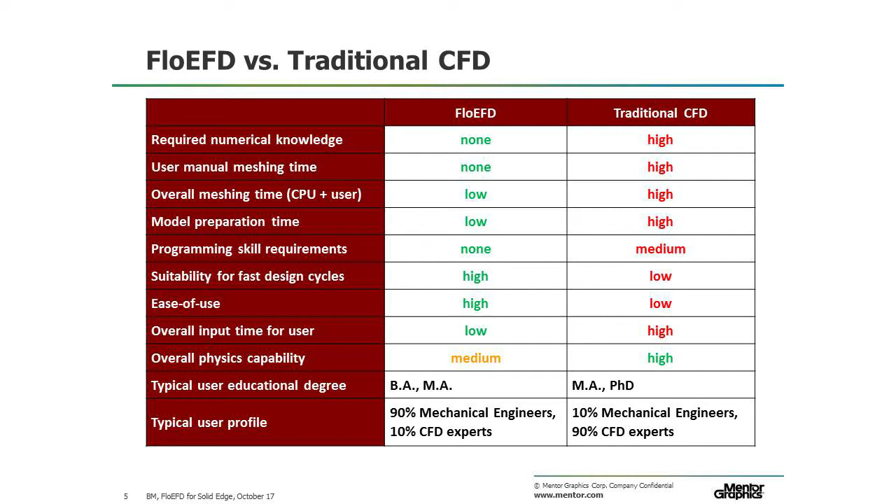Yo creo que voy a pasar, por el tema del tiempo, un poco a ver el vídeo que tengo preparado, que está muy interesante. Un detalle importante es: ¿cuál es la tecnología que está debajo de FloEFD?

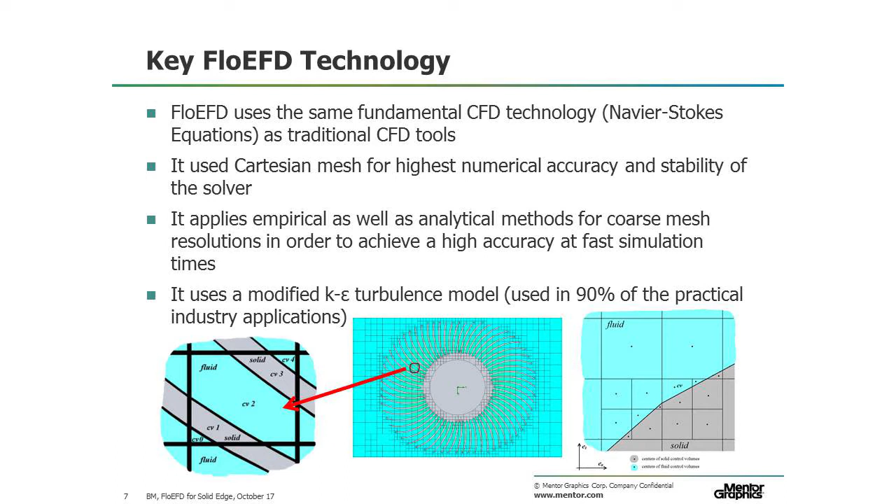Las técnicas de mallado son mallas cartesianas, no es la malla típica de elementos finitos. Es una tecnología que, al final, vamos a tener también que hablar de número de elementos, el tamaño de la malla es importante, pero no es la clásica de elementos finitos, sino que todo el dominio computacional, el dominio fluido, se discretiza con mallas cartesianas.

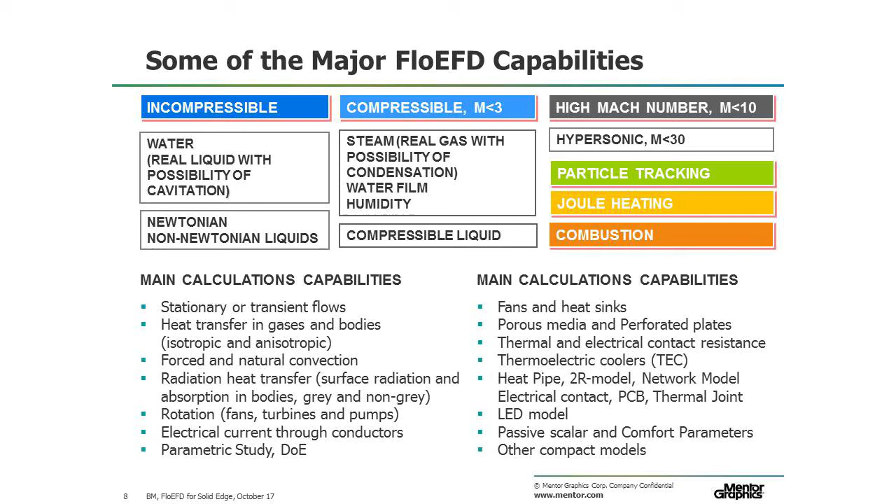Y el software es capaz de distinguir lo que es sólido de lo que es fluido, y la malla se refina. Es una tecnología en la que FloEFD es un código que se basa en las ecuaciones de Navier-Stokes, como todos los códigos CFD tradicionales, y utiliza un modelo de turbulencia K-épsilon, como todos los modelos de CFD tradicionales.

Capacidades realmente muy potentes, capaz de manejar fluidos compresibles, incompresibles, tiene modelos de combustión. O sea, es realmente potente.

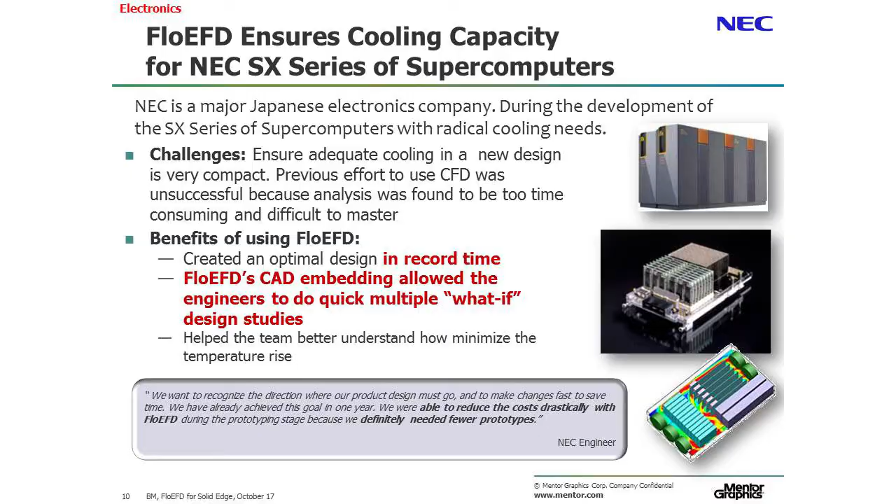Y hay diferentes módulos dentro del software. Y luego tengo un montón de ejemplos de aplicaciones, pero voy a pasar directamente, por el tema del tiempo, a enseñaros el ejemplo, el vídeo.

In this example, we'll look at how FloEFD, a CAD-embedded CFD tool for Solid Edge, can be used to analyze the flow and thermal management problem of a new audio amplifier to ensure that it meets consumer electronics standards regarding its temperature distribution. Let's take a look at our Solid Edge model.

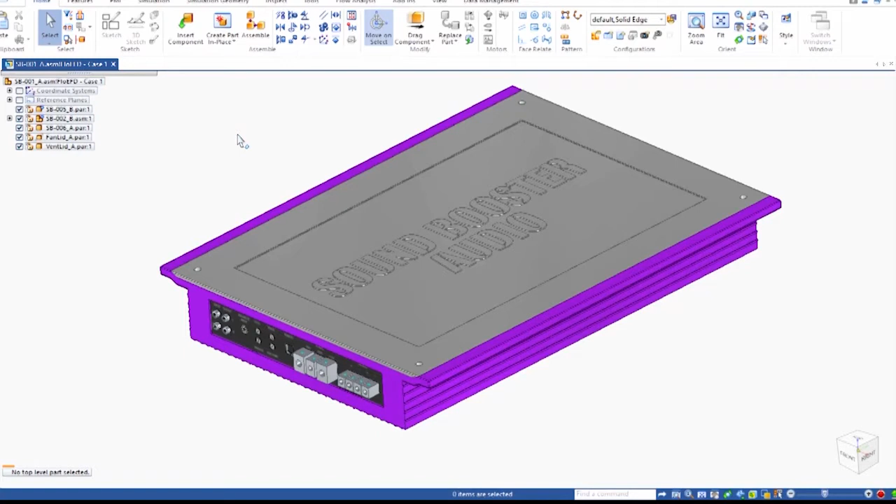You will notice that because of the FloEFD add-in, there are a few additions to the interface, like the Flow Analysis tab for the command ribbon and the FloEFD tab for the edge bar. What you will see as we set up the CFD problem and ultimately look at the results is that FloEFD ends up feeling like an extension of your already familiar Solid Edge environment. And one of the keys to that is being able to work directly with your native Solid Edge model.

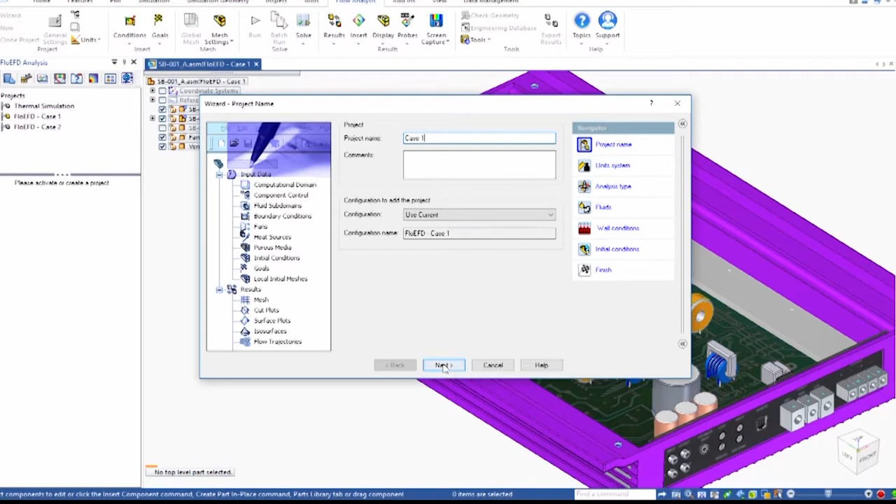A convenient way to create a FloEFD project is to use the wizard, which guides you through the setup of the basic definition of your analysis. First, you will name the project, then select the unit system. Next, you will define the analysis type. In this case, the amp is cooled by a fan, so the forced convection cooling within the box will be the focus of the analysis, and we'll define this case as an internal flow problem.

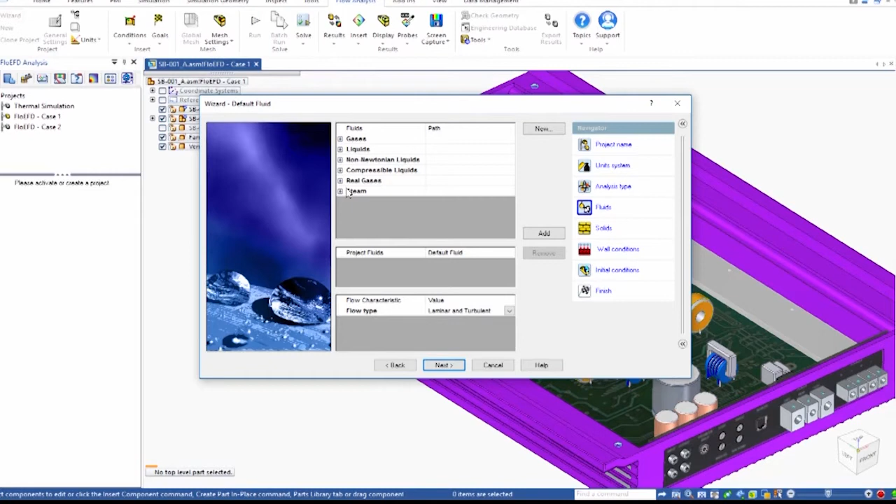Also, we want to include conduction effects, so we will select heat transfer in solids. Next, we'll choose the fluid in the analysis to be air and select aluminum as the default material. And even though we are not modeling the airspace around the amp, in this example we can still include the effects of natural convection by applying a heat transfer coefficient and ambient temperature.

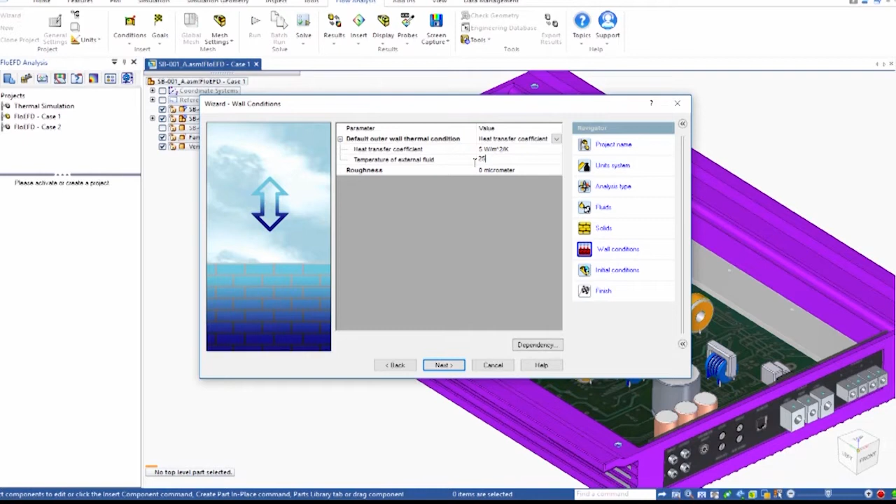We'll set some initial conditions and finish the wizard, which will create our project in the FloEFD tree named Case 1.

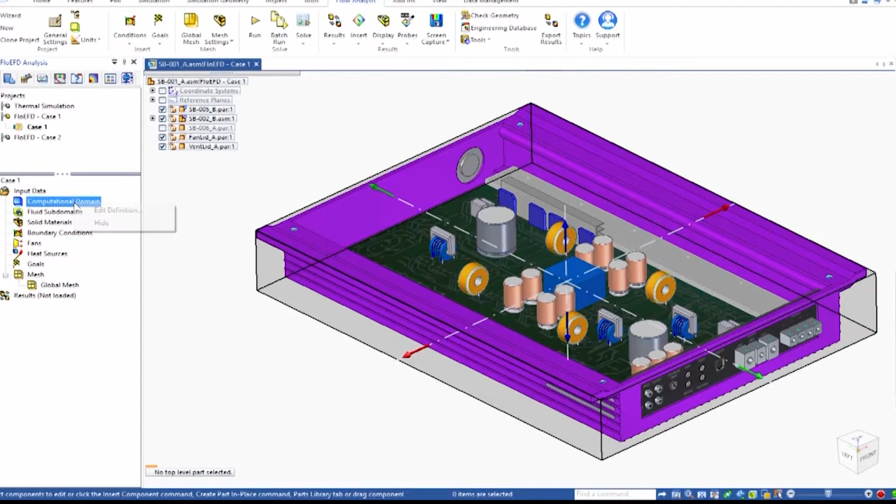Now we need to finish setting up the model by assigning the remaining inputs. We can see that the computational domain is recognizing the model properly, so we can go ahead and hide it, and get started by assigning materials to the components that are not made of the default material of aluminum.

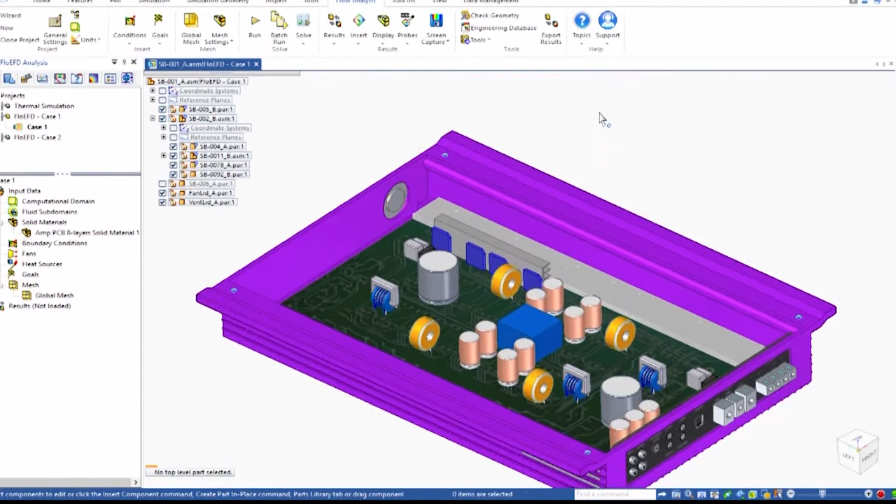So we'll select the PCB and assign it an anisotropic material property, since the conduction in the PCBs is typically different in the through-plane and in-plane directions. We'll also pick the transistors for this amp and assign a different material to them.

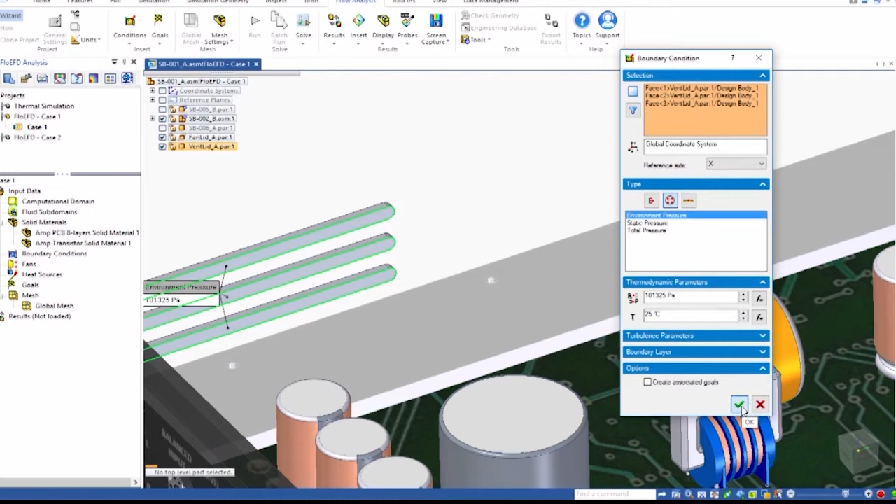Since this amp is modeled as an internal flow case cooled by a fan, we need to assign a boundary condition to the slots where the air can exit the enclosure. We have put lids over the openings of the enclosure at the inlet and outlets, and these serve the purposes of isolating the empty space within the amp that FloEFD can identify as the airspace, and also give us faces to apply boundary conditions to.

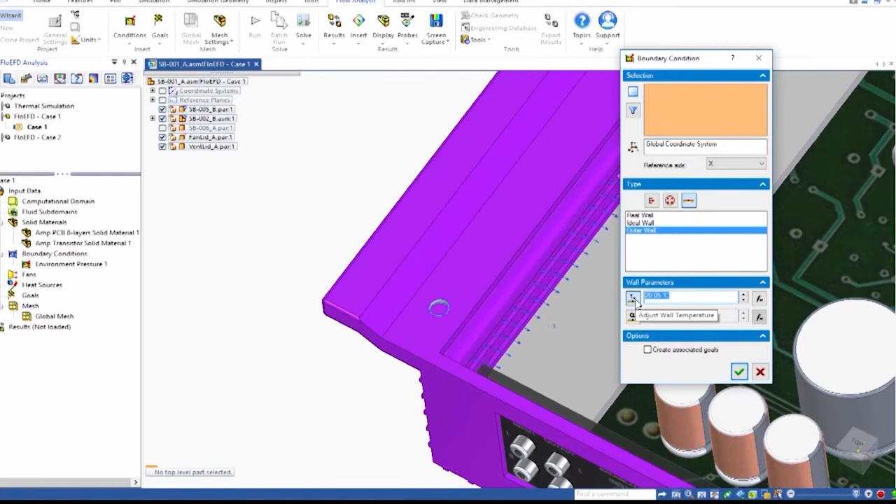Another boundary condition we'll assign is a temperature condition to the outside case along the two mounting faces of the amp. So for this, we'll again insert a boundary condition, change the type to be a wall condition, and assign the appropriate temperature of 25 degrees C.

Next, we want to add a fan to force air through our amp enclosure. We'll move over to the lid at the inlet to the amp and select the annular shaped face on the inside of the lid and assign a fan curve to it. And we'll include a rotational component to the incoming flow by adding swirl.

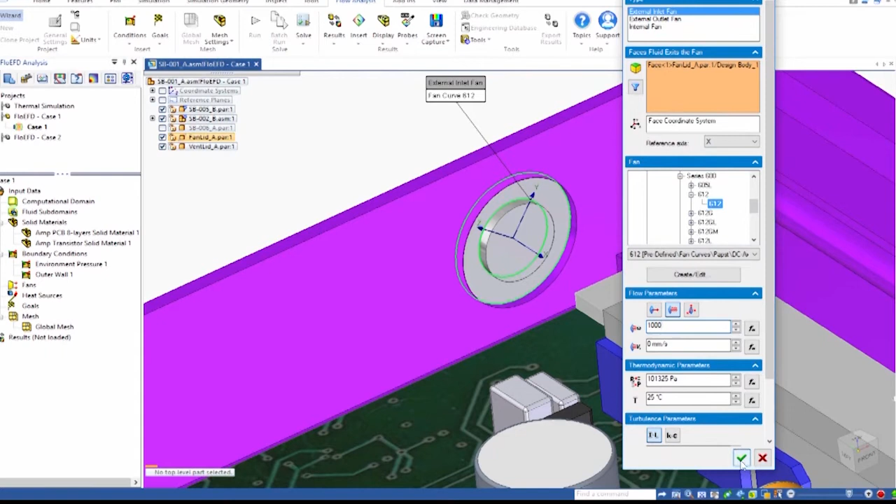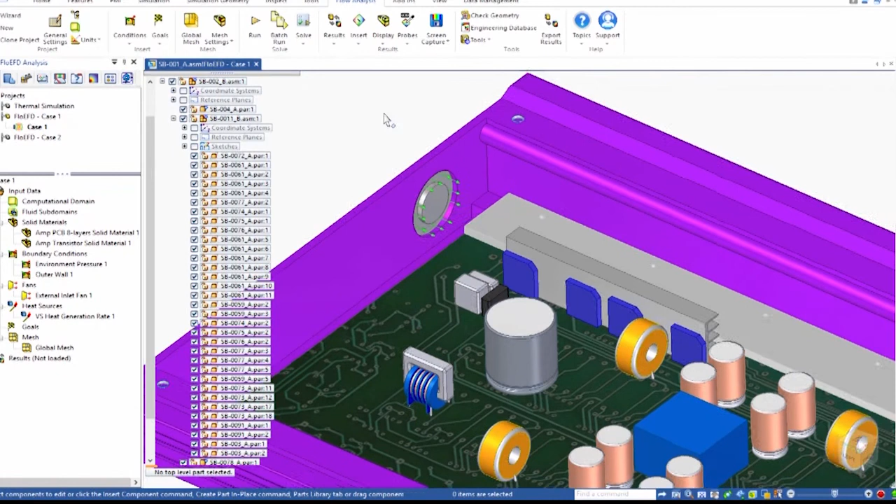Now we need to assign the heat sources. We'll select the 4 transistors and assign an overall heat generation rate to them of 20 watts. Next, we'll select the capacitors and give them a total heat generation rate of 10 watts. The remaining heat produced by the electronics we'll assume can be distributed across the PCB.

Next, we will assign some goals, which serve a couple of purposes. One, they are a way of extracting from the analysis quantities of interest. For example, we want to know how hot the transistors will get, so we will assign a volume goal of average and max solid temperature for these components.

Similarly, we want to know, based on the fan curve that we assigned, what the eventual flow rate is that is produced by this fan. So we can assign a volume flow rate goal to the fan face. The other purpose of goals is to help guide the convergence of the run, meaning that the solver will look for these goals to reach a steady state solution before determining that the solver phase of the analysis is complete.

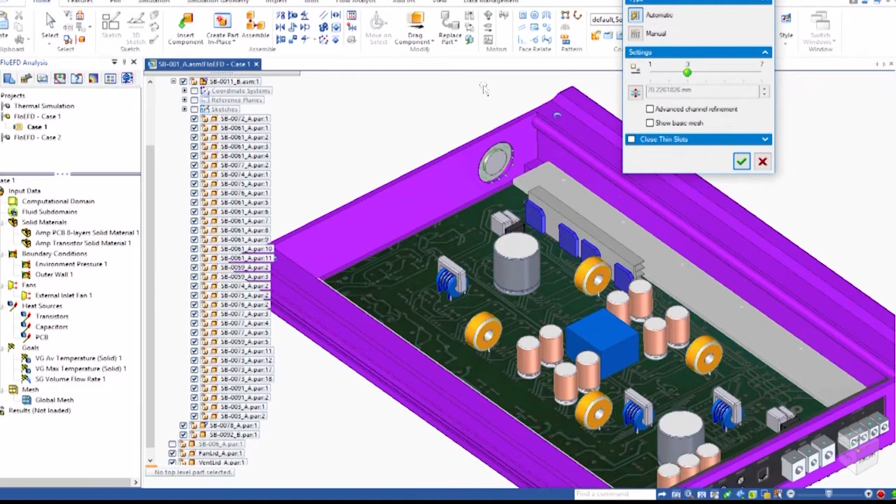Lastly, we'll take a look at our mesh settings. One of the core strengths of FloEFD, which overcomes a long-standing bottleneck in the CFD process, is its meshing approach. Let's look at the global mesh settings. The most common option is to use the automatic approach, which uses a slider bar to control the mesh fidelity. Through this simple approach, FloEFD can mesh a wide range of complex geometry easily.

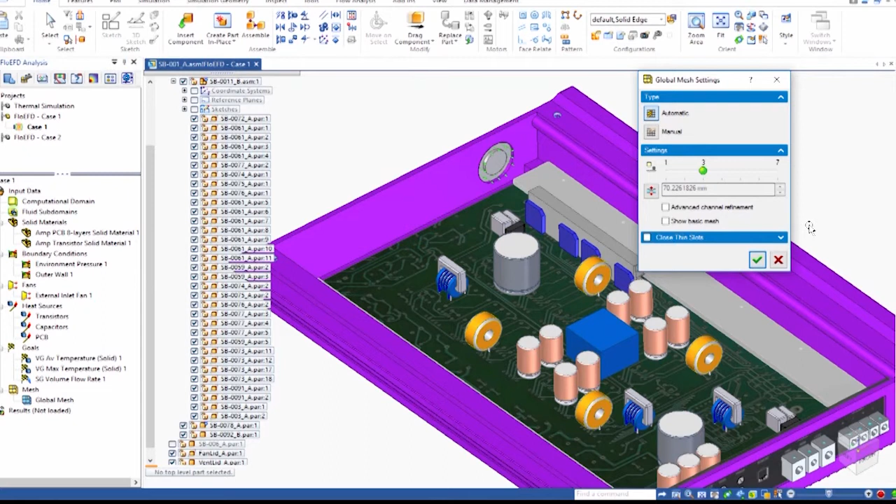And more advanced meshing options like local meshing and solution adaptive refinement are available as well.

Now that we have set up our problem, we are ready to run the analysis. This is the number crunching phase of the process, where the software will determine what solid and fluid volumes need to be considered, create a mesh that captures these geometries, and then solve the appropriate equations to reach a solution for the flow and thermal fields.

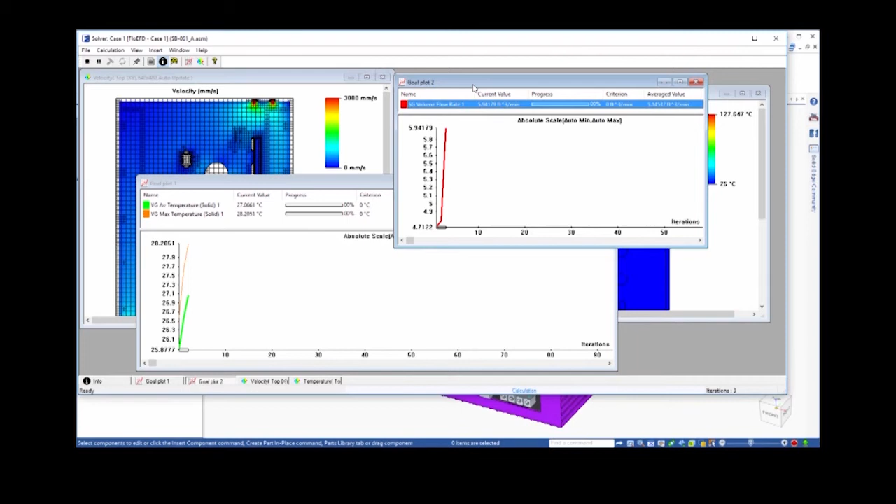This process can be tracked from the Solver Monitor window, which lets you chart the progress of your run, preview the solution at each iteration on various planes, and graph the convergence of your goals.

When the analysis is complete, the run will stop, and you can start to look at the solution on your Solid Edge model. Let's take a look at the flow field through the enclosure, and a nice way of showing this is through cut plots.

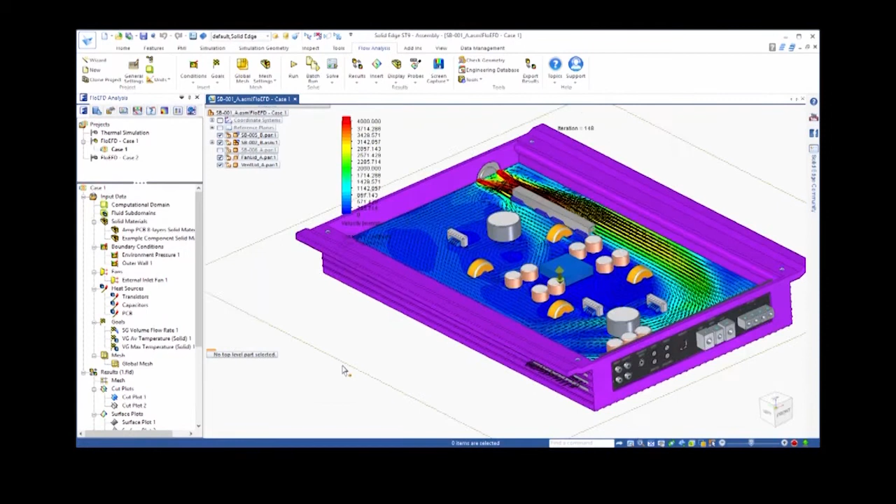We'll start by looking at the velocity field, with vectors showing the direction of the flow and the colors showing the speed of the air. As you can see, the fan is positioned to direct flow onto the heatsink, which it does effectively. However, a lot of the flow bypasses the rest of the electronic components on the board.

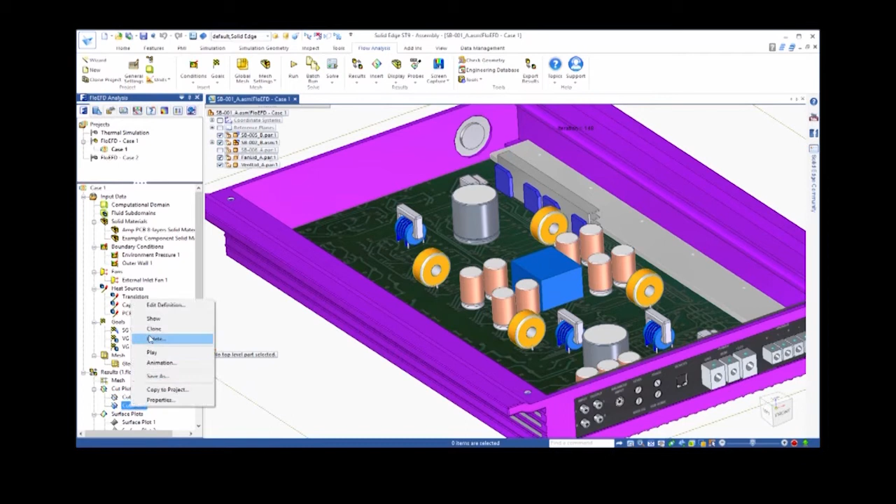If we switch our plot to display temperature, we can see the effect of this. The portion of the board in the middle with low speed flow is relatively hot.

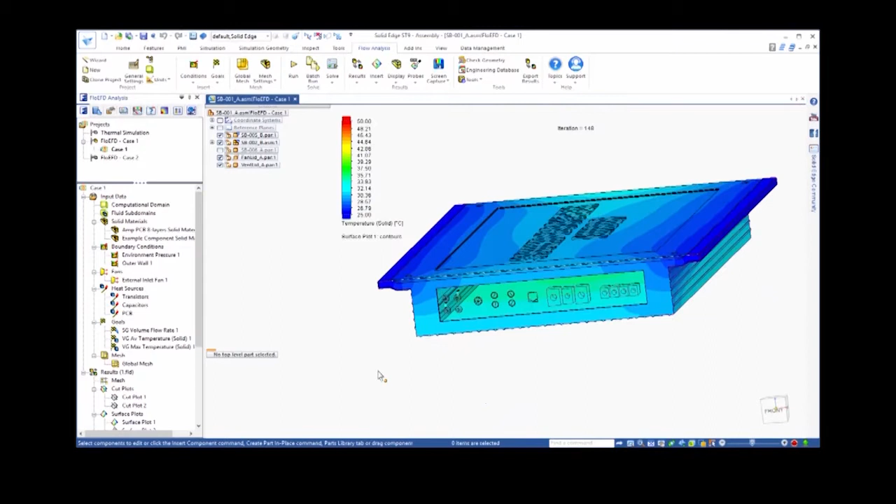Another way of looking at the temperature distribution more three-dimensionally is to create a surface plot. In our first plot, we will look at the temperature on the outside of the enclosure, which needs to be kept below a certain value to stay within consumer electronic standards. We can rotate the model to see the temperature distribution, as well as use our probe tool to conveniently extract the temperature at locations of interest.

Let's also look at the temperatures on the components inside the enclosure. Again, we can see the higher temperatures around the center of the board.

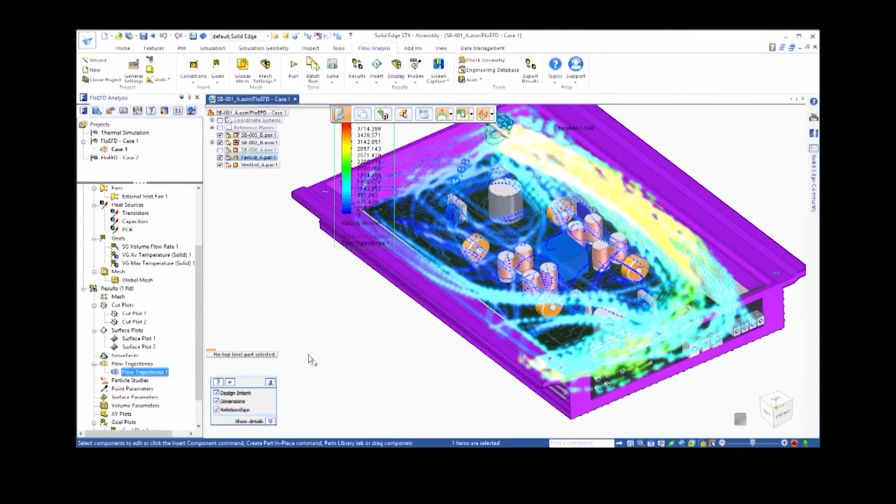Another powerful viewing option is to look at flow trajectories. These can be animated to give an overall picture of how the air flows through this device. And notice that with all of these viewing options, you can see the CFD solution directly in the context of your Solid Edge model.

So in looking at the results from our first case, we want to make some design changes to improve the cooling effectiveness. And this is where the advantages of working directly with the Solid Edge model drastically reduce the amount of time and effort required to explore the design space with CFD.

One of the ideas that we would like to test based on our first solution is to shift the fan slightly towards the center of the amp. We are hoping to divert a portion of the incoming airflow more towards the central region of the board while still maintaining strong flow through the heatsink. Additionally, we'll go ahead and increase the length of the heatsink fins to further help cool the transistors.

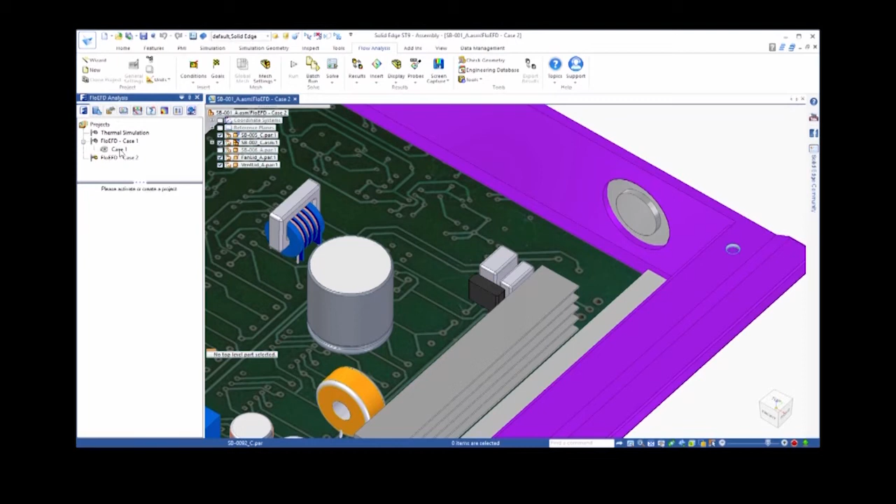So we have set up a second family of assemblies member in Solid Edge that reflect these design changes. Now, all we need to do is clone the setup from our first case to the new design, which we'll call Case 2. This new case now has the same setup as Case 1, so we are ready to run our next test.

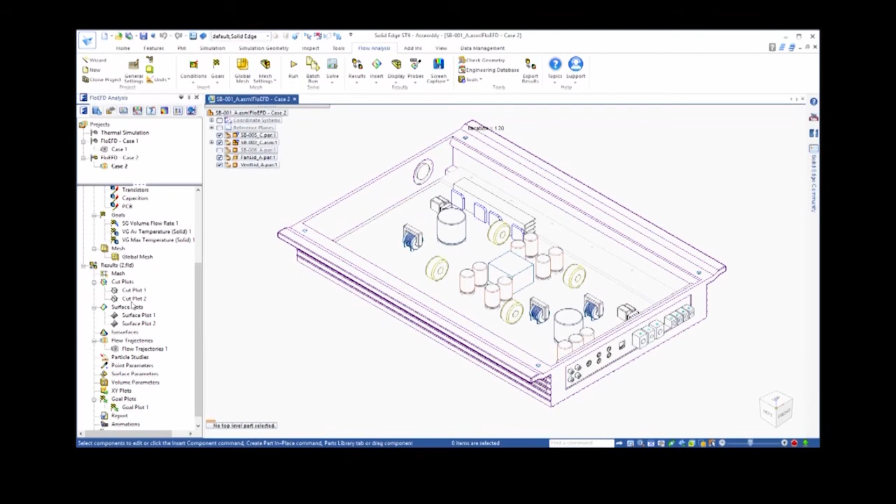After running Case 2, we can look at the solution to see the effects of the new design. Our cut plot shows that there appears to be more flow diverted to the center of the board, and that region appears to be cooler. We can see the same effect when viewing the surface plot.

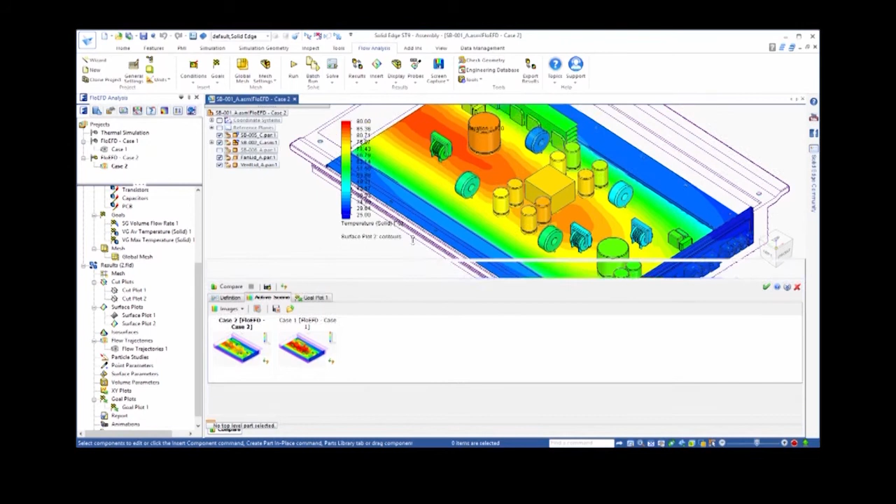And a convenient way to more directly compare the results for the two cases is to use the Compare tool. From here, we can choose the items that we would like to compare, which for this example would be the active scene, which is the plot that is currently displayed on the screen, as well as the goals information. Using this tool, we can go to the Active Scene tab and see the same plot for both Case 1 and Case 2 next to each other.

In our instance, Case 2 is displayed first, since that is the project from which we ran the Compare tool. You can see clearly that the temperatures on the board have decreased in Case 2.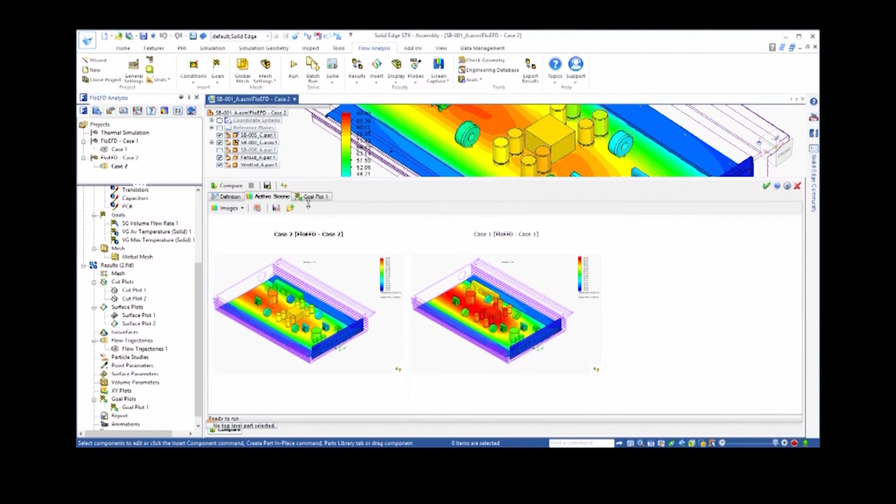If we want to quantify the temperature reduction of our key components, the transistors, we can go to the tab that shows the comparison of the goals. Again, you can see that the temperature for Case 2 is substantially improved.

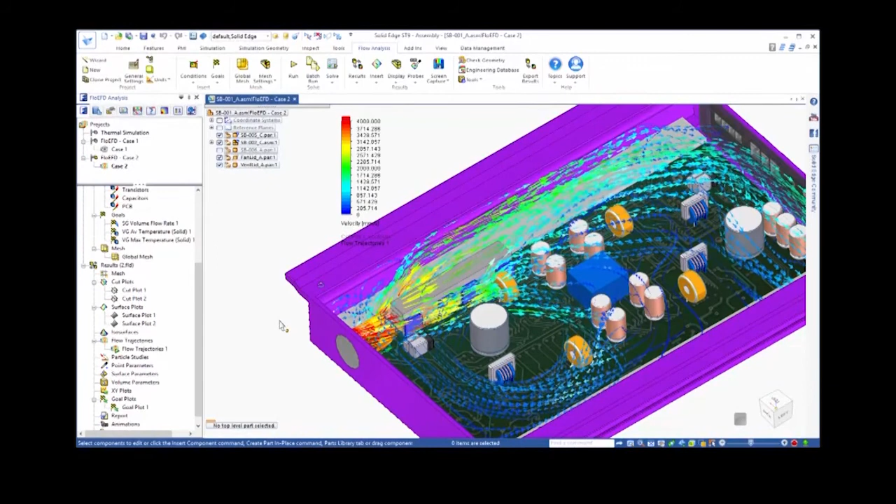This example shows how FloEFD for Solid Edge can be used to improve the design of an audio amp relative to thermal management. FloEFD puts the power of CFD directly in the hands of Solid Edge users with an easy-to-use, fast, and accurate analysis tool.